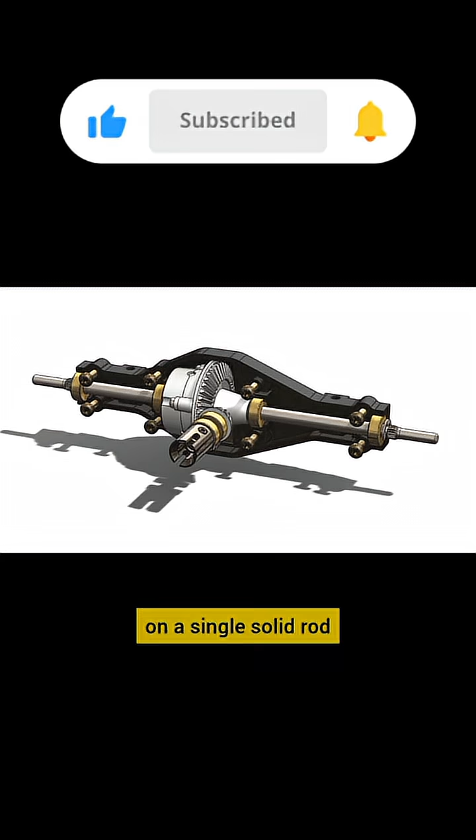If both rear wheels were locked together on a single solid rod, they'd be forced to spin at the exact same speed all the time. That works fine when you're driving straight.

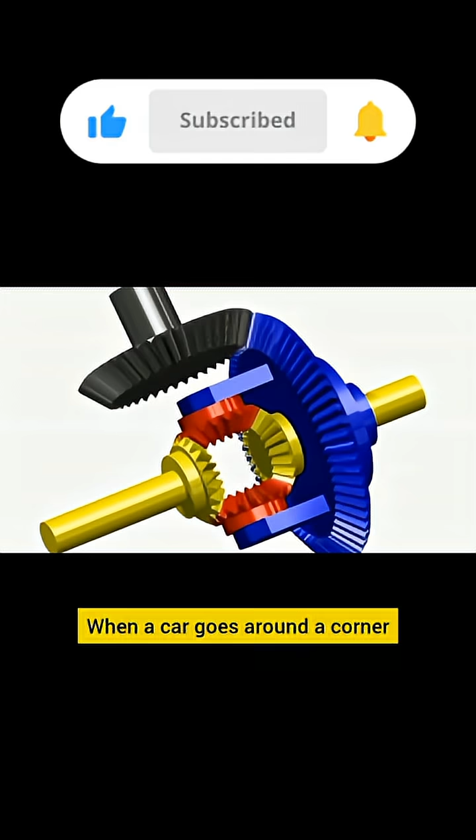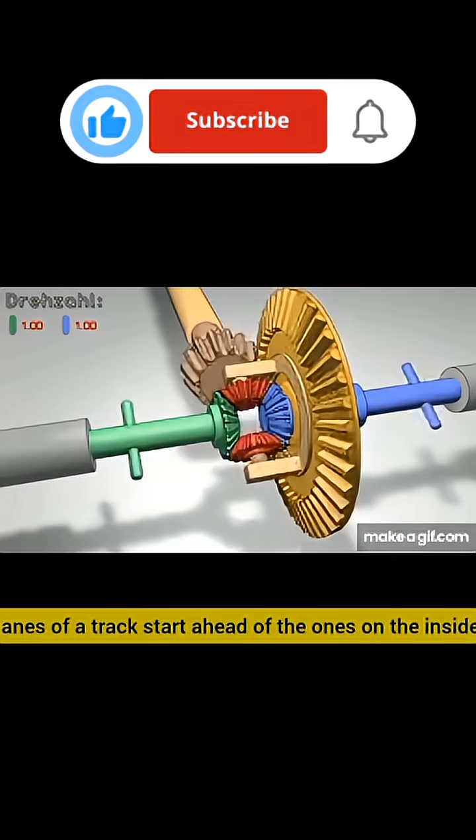The problem starts the second you turn. When a car goes around a corner, the wheel on the outside of the turn has to travel a longer distance than the wheel on the inside. It's the same reason runners in the outer lanes of a track start ahead of the ones on the inside.

If both wheels spin at the same speed, one of them has to slip, hop, or drag. That would wear out tires fast, stress the axle, and make handling terrible.

More than 200 years ago, engineers solved this with a device that's still under almost every rear-wheel drive car today. It's called a differential, and this is how it works.

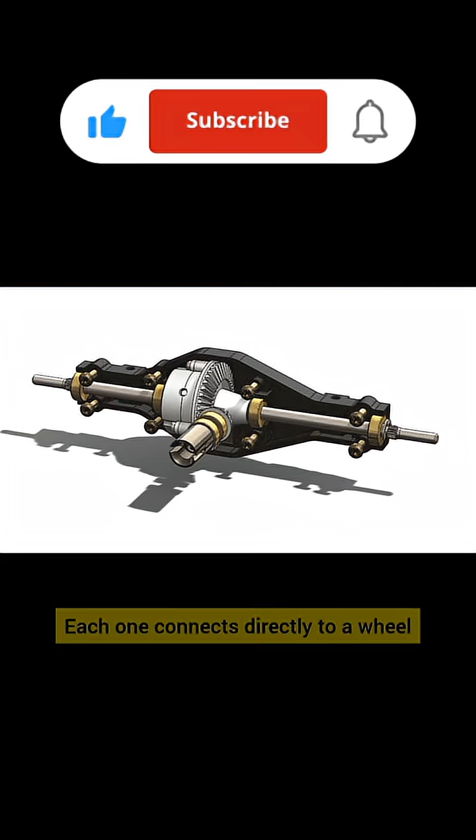What you're looking at is a complete rear differential axle assembly. The two long rods extending left and right are the axle shafts. Each one connects directly to a wheel. Their job is simple: take rotational power and deliver it to the tires.

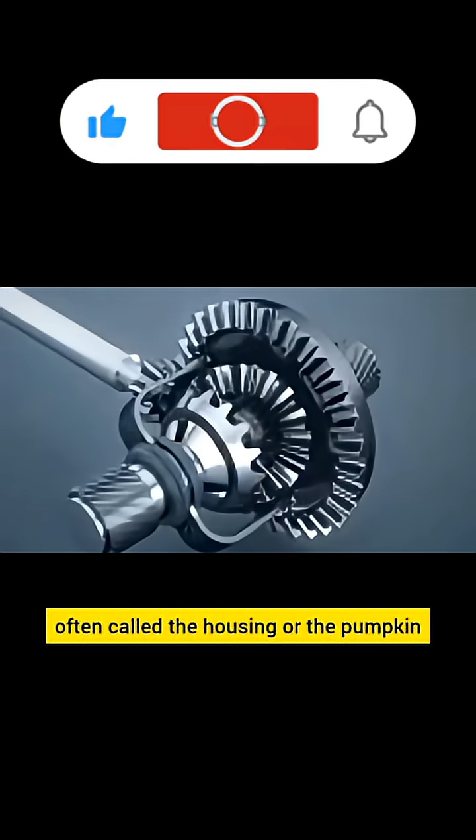All the magic happens in the bulge at the center, often called the housing or the pumpkin. That's where the differential itself lives.

Power from the engine doesn't come straight to the wheels. It travels down the length of the car through the propeller shaft, also called the drive shaft. That shaft spins into the back of this housing and ends in a small but very strong gear called the pinion gear. The pinion gear meshes with a much larger gear you can clearly see in the image.

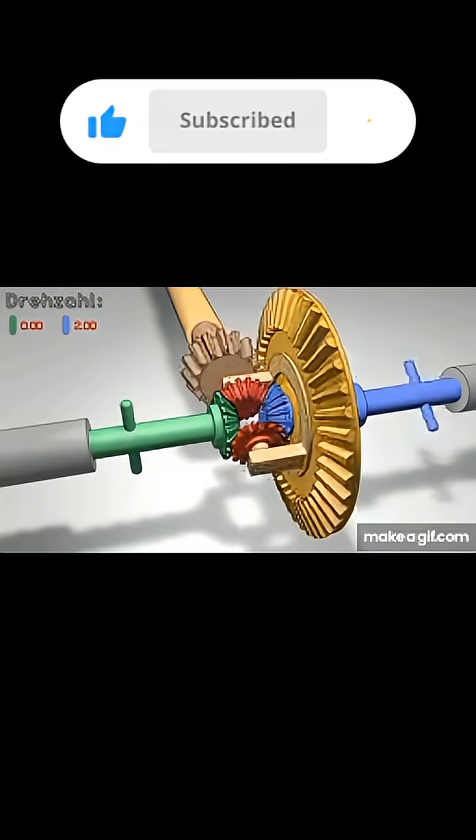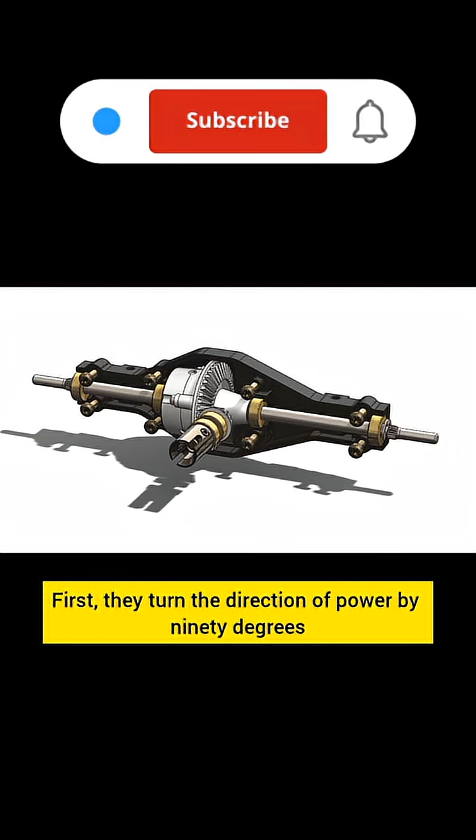That big one is the ring gear or crown wheel. The pinion and ring gear do two critical things at once. First, they turn the direction of power by 90 degrees. The drive shaft is spinning front to back, but the wheels need to spin side to side. These gears redirect that energy.

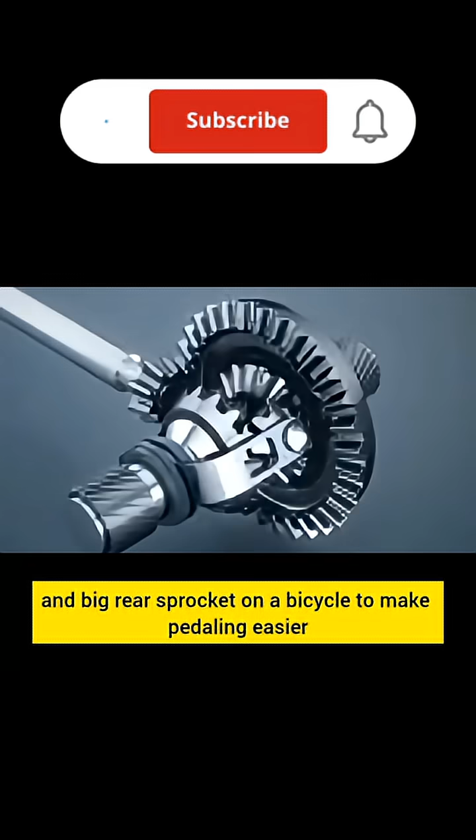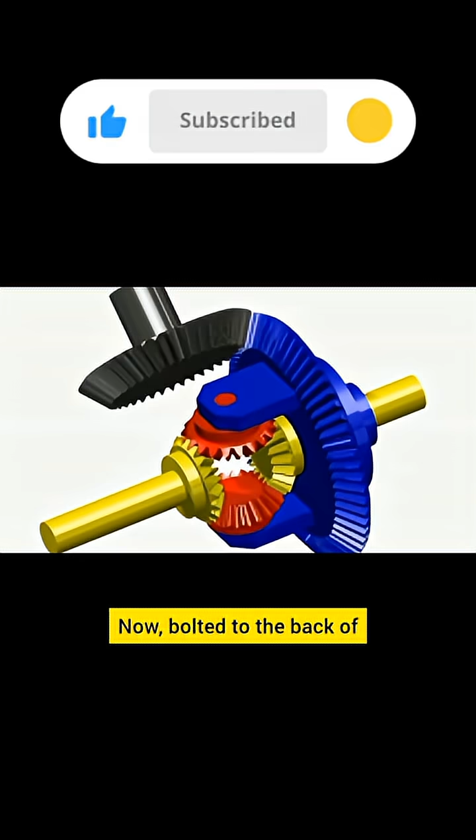Second, they multiply torque. The small pinion turns the big ring gear, just like using a small front sprocket and big rear sprocket on a bicycle to make pedaling easier. You get less speed but a lot more twisting force, which is exactly what you need to move a heavy car from a stop.